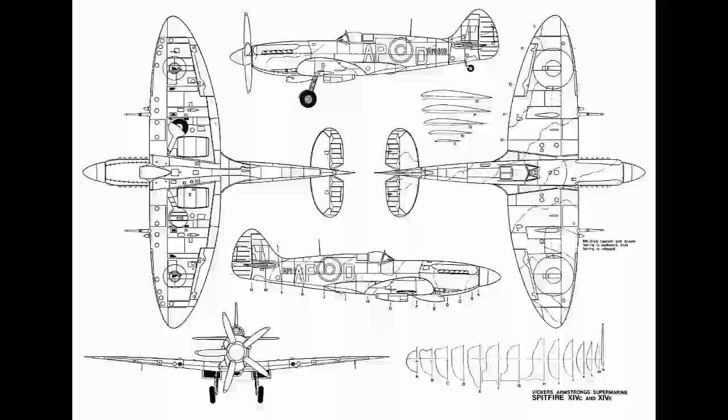Then 3-view drawings. So I finally found this one and another really good one, and then we started to blow it up to the appropriate size that we wanted. So I went to my Microsoft Office Publisher, inserted the picture and expanded it.

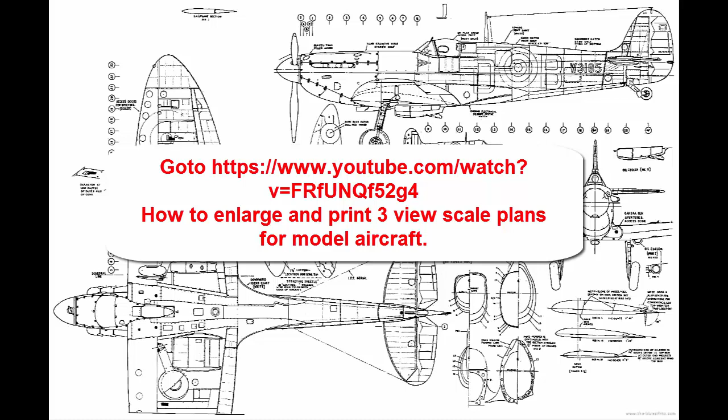If you want to see how that's done, go to this reference here and watch how to enlarge and print 3-view plans for model aircraft.

I now have an alternative method where I have filed my enlarged plan size on Google Drive, and you can use this reference to go to it, open up the drawing and then print it, and I'll show you how we do that now.

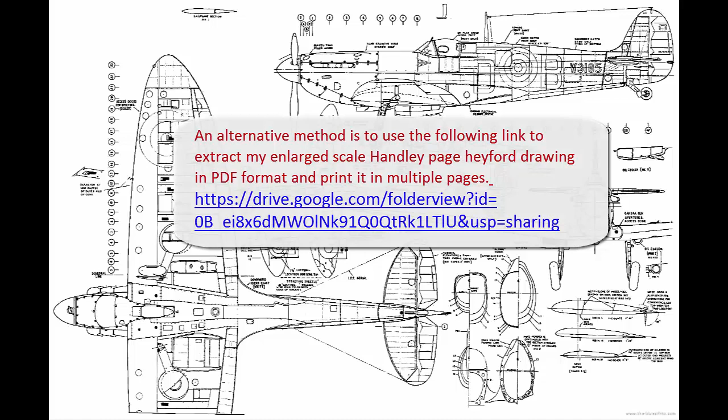So we start by copying down this link, reference number there, go to our Firefox or Google, then we come to the top line up here and we put in our link. There's our link. Then we press enter.

So here's Google Drive with some photographs and different bits and pieces. It might be handy for you. And we go to the 3-view, which is enlarged. Click on it.

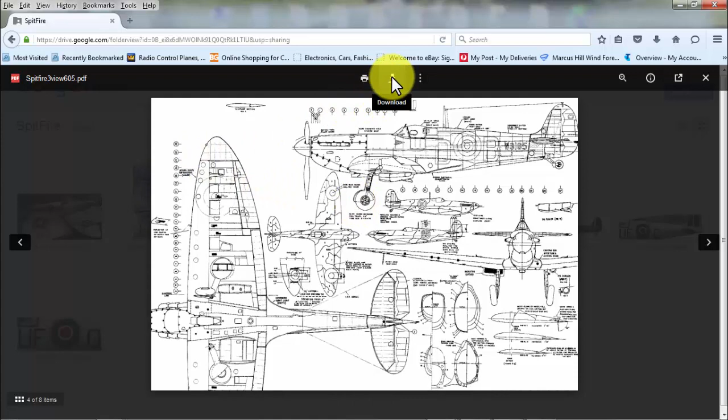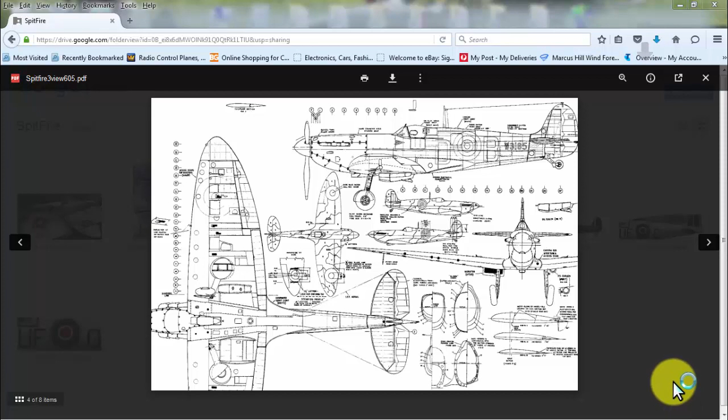Then we download it. Now we can save it, or what I can do is I can open it here. It'll open it up in my PDF reader. I'm going to press OK. It's downloaded, I'll double click on that. So it's now opened up in the PDF reader, and then we simply go to print.

Now what it gives us is these four things. So the poster is the one you want. It's not already clicked, and the poster will then print it out as a poster. Automatically gives us the size, 81 by 57 basically inches, and it gives us all these ones in the page size that's set up. So we just check that.

So we go properties. So it will be an A4, 210 by 297, or if I had an A3 printer I'd make it A3. I'll go print preview, and we could make it photo enhance, text and image. You can make it either portrait or landscape. Sometimes it doesn't matter - this one here at the moment is in portrait.

Then we go to page, nothing to change there. Advanced - we won't have high speed, we'll make it low speed. Preview, we can make it grayscale, all black and white. Okay.

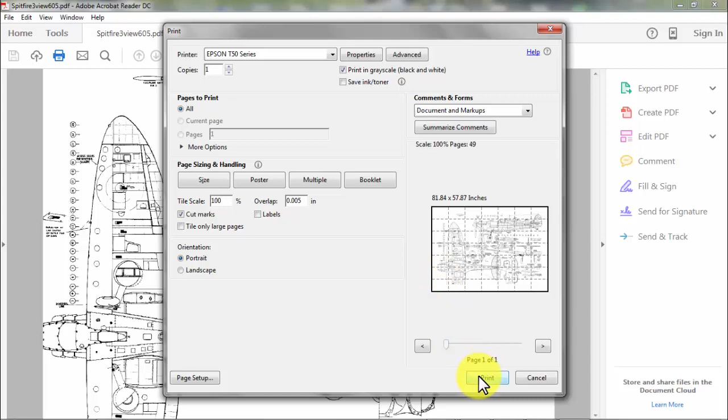So then you basically go print, which will lead us into our print preview. Might be beyond - oh, there it is. So here's our 49 pages over here, and we can click on any page. You just see they're showing up.

So that'll print those 49 pages, and then basically you have the guide marks on the edges, and you can cut to those or whatever you like, and then sellotape it all together, and then you have your enlarged three-view drawing of your Spitfire, which we can use as plans to make our scratch built plane.

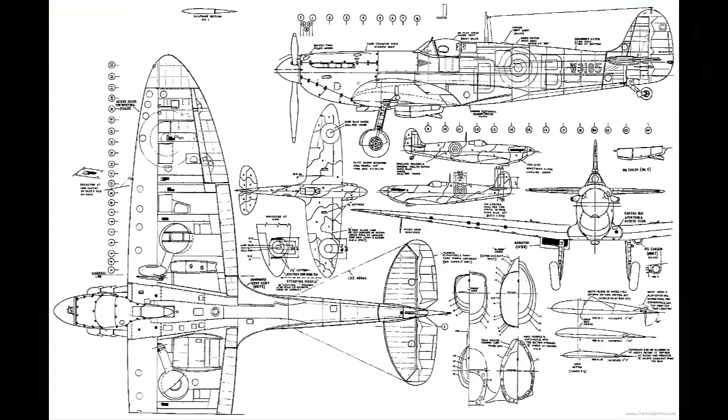Okay, so I won't bother printing them out, I've already printed them out. This link I'll include on the comments page for easier copying.

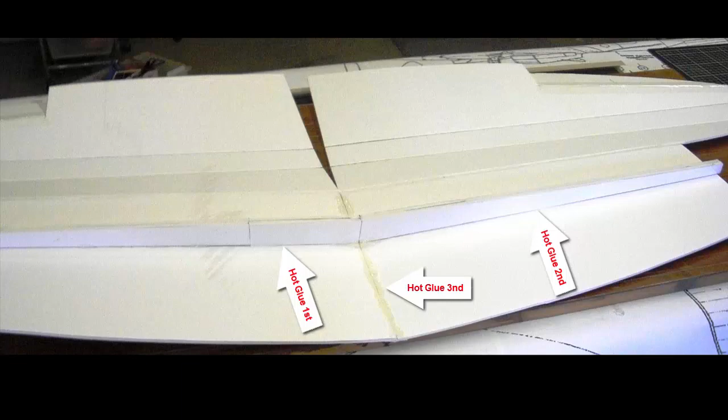We add a bit of reinforcement to the centre section and start installing the servos. Trial matching the top sections and trim accordingly.

Start with either the left or right hand wing panel and glue along the leading edge and along the spar first, then glue along the trailing edge. Repeat on the other wing panel, completing the same.

Add barbecue skewer sticks as per the picture, which add strength and stop wear and tear on the wing. I also added some hot glue around the edges, because quite often that wing might just tip and touch the ground.

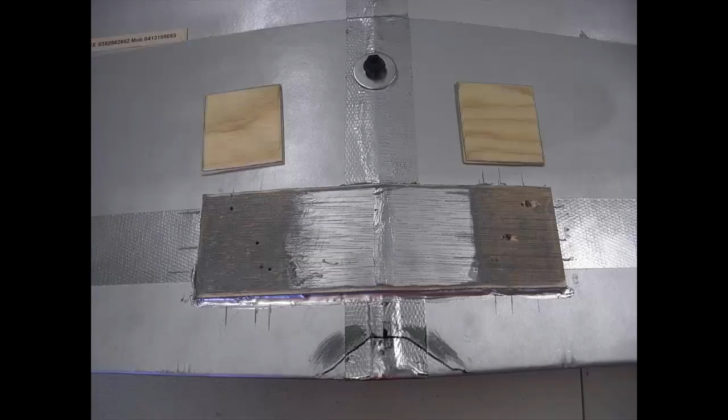The undercarriage mounting plates were originally 2mm ply plates. Unfortunately, on the first landing I broke one of them off, so I decided to reinforce it with an extra 1/8 inch ply plate on top for the screws, and this was successful.

Aileron movement: 15 mil up and 15 mil down.

Receiver located with double-sided tape at the C of G on top of the wing. I also taped down the aerials.

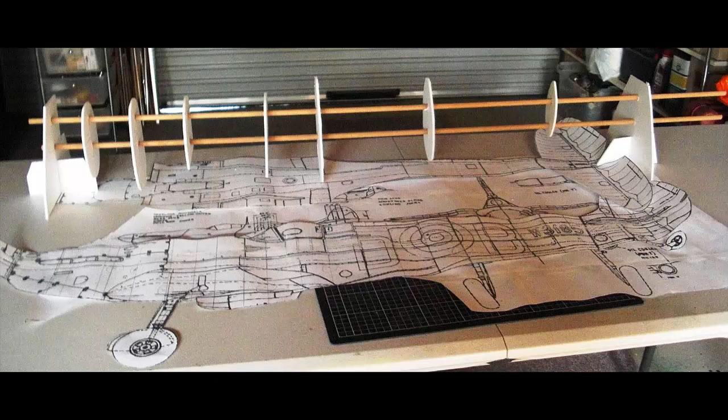The fuselage was a bit of a challenge, so I had to get an idea of the shape. So I made up this jig with some formers to get an idea of the shape and what I was going to do. I started with the rear section from the back of the pilot's cockpit to just before the tail section, and made this as per the picture, with some 5mm foam board, with the first former and the end former.

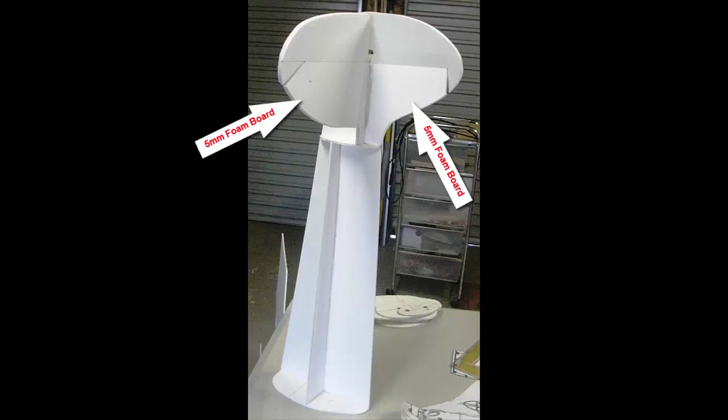I then made the rudder and elevator out of 5mm foam board and added them to the rear section. The rudder and elevator at the hinge line were both beveled, and then I used light packing tape to form the hinges.

Getting into the swing of things, I now made some formers for the centre section so I'd get a smooth surface. Then I got onto the middle section, the wing section, and did the same method.

I added the plywood firewall and then made a separate little section from the firewall to the spinner. So we finish up with three separate sections not glued together yet: the rear section to the back of the cockpit, the next section from the back of the cockpit to the firewall, and then a separate section from the firewall to the spinner base plate.

Before we start sheeting everything, we cut all the holes for cables and airflow through the inside, especially for the ESCs, batteries, etc. This was the original placement of the battery, but due to the C of G, that had to be really modified and it moved even more forward.

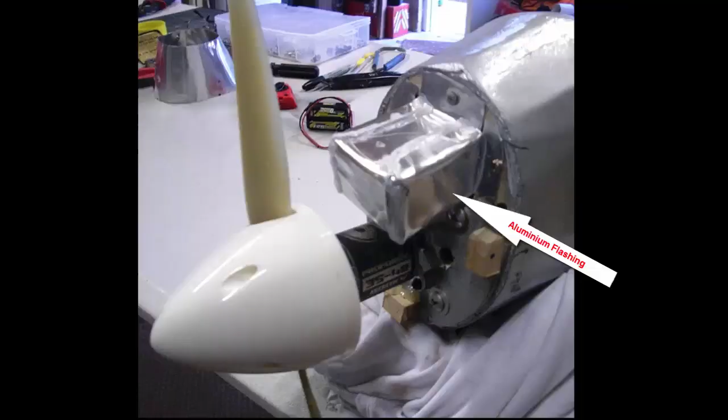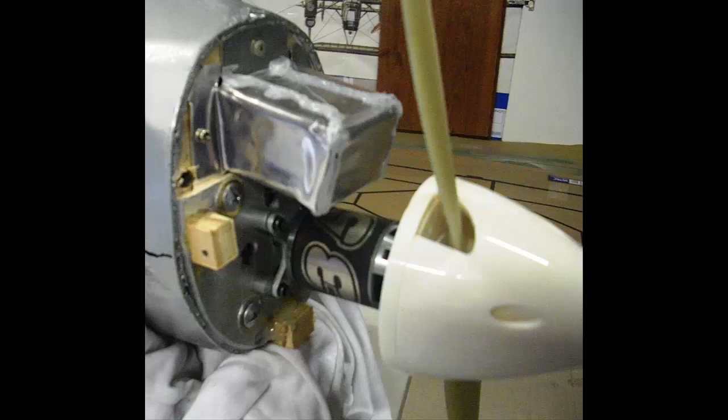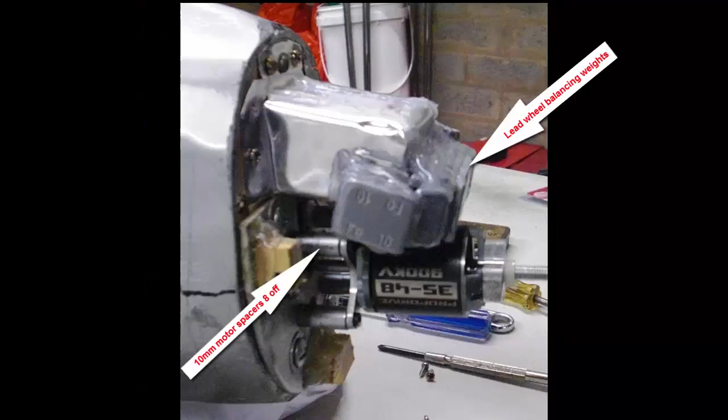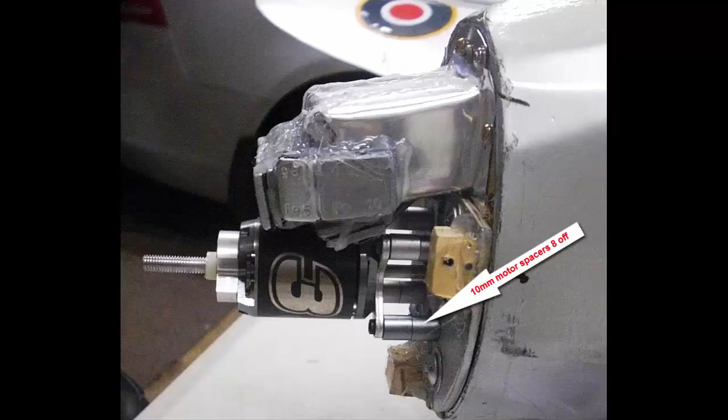Due to a rearward C of G at the end, we had to modify it a bit, so I added an aluminium casing for the battery made out of flashing sheet, which extended from the firewall. We had to cut down the engine firewall, and then we doubled up on the spacers to the motor, moved the motor forward a little bit, and then stuck on tyre balancing weights of about 250 grams to the aluminium casing, which improved the C of G dramatically and saved a lot of extra weight.

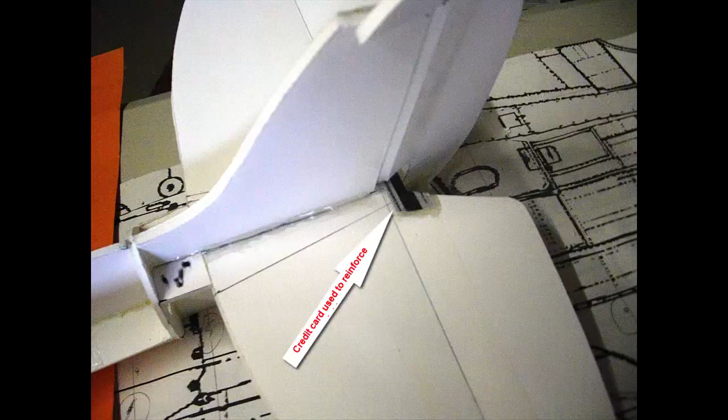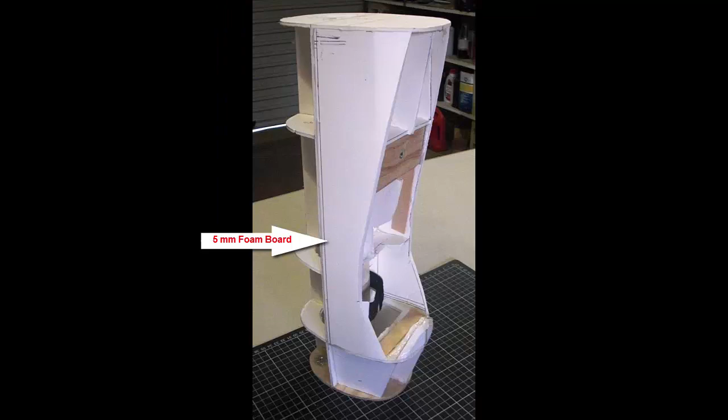So we now commence the sheeting of the formers, still in three pieces. Remember for tight curves to remove the paper on the inside of the curve to help bending.

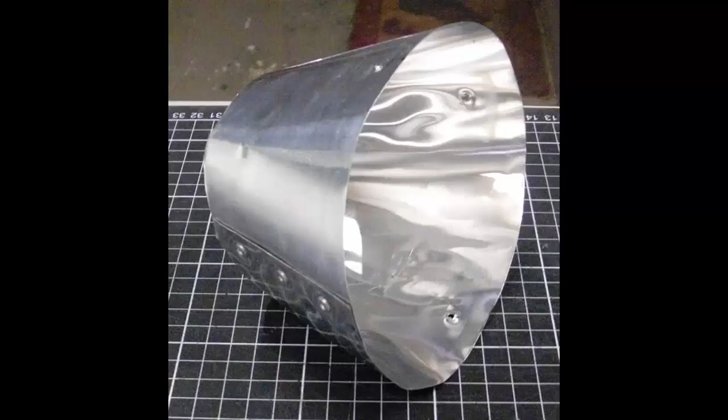The canopy was cut from a laundry liquid bottle and hot glued on.

All markings and roundels I printed on my printer, cut out and glued on with contact adhesive, then sprayed over with varnish. I've left PDF drawings of the roundels and markings in Google Drive, where you'll find the enlarged plan size, as per the link at the beginning under comments.

I used a spray can of metallic silver, a fast drying enamel called Accent Quick Spray. I used about 1.5 cans.